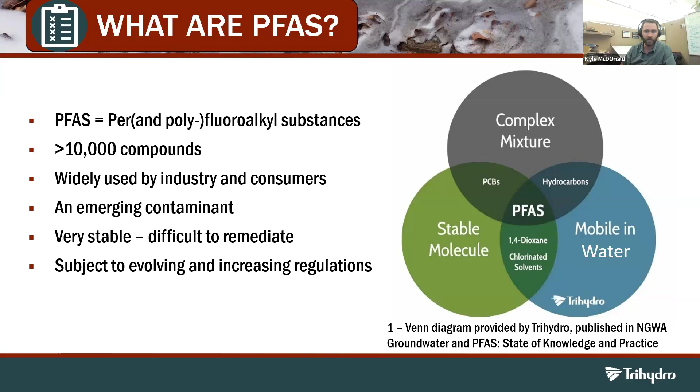Next slide, Jordan. So we're going to go through a really quick timeline on PFAS, and the purpose here is really just to illustrate why you're hearing so much about PFAS right now. This is the PFAS emergence timeline. Again, all man-made synthetic chemicals originally developed and synthesized in the 1930s and 40s, really put to widespread use in manufacturing in the 50s and 60s. So we're talking about 70 plus years of widespread manufacturing and use.

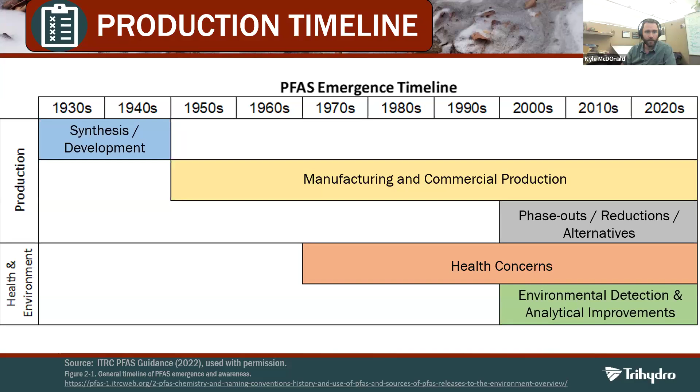But it wasn't until the year 2000 that we started looking at PFAS as a chemical to potentially regulate, and that all started with the voluntary phase-out of PFOS from US manufacturers. Next slide, please. What followed was these 2 decades of slow and steady trickling of federal regulations addressing PFAS. We're not going to go through every point on this slide, but we're calling this phase 1 of federal regulatory actions affecting PFAS. Fast forward to October 2021.

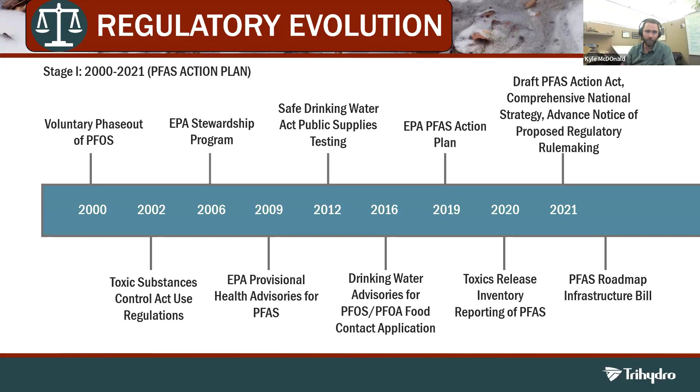And at this point, we're in the 4th and final year of the initial strategic roadmap, and it really has been the busiest and most consequential year yet. That's highlighted by several pieces of key legislation that are proposed or final. Next slide, please, Jordan.

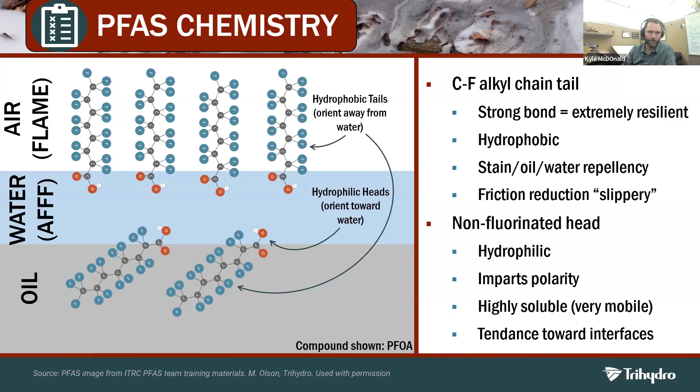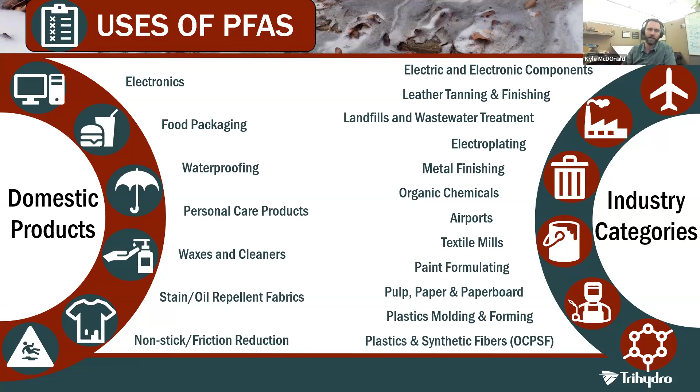Those attributes lead to PFAS being used in a wide range of industrial categories and domestic products. Those listed on the slide here are some of the better known ones. But importantly, this list is not comprehensive—we know PFAS are used in many other products and industrial sectors. It's kind of at the stage of where we know what we don't know here. There's a lot of effort, including pieces of federal legislation, being pushed to understand how widespread PFAS use is in our modern world. Next slide.

The ubiquity, coupled with those very low levels of interest—parts per trillion, low parts per trillion levels—give rise to a very heightened risk of cross-contamination and false positives in data when sampling and analyzing for PFAS. Couple that with the fact that your results are likely to be scrutinized because this is very much the hot topic of the moment. It creates a very uniquely challenging situation in terms of sampling and analyzing for PFAS compounds.

It is very important that if you have personnel sampling for PFAS, whether that's voluntary activities or activities compelled by some sort of regulation, that your field personnel are knowledgeable and well-trained in PFAS-specific sampling protocols. There are a number of pitfalls here that can result in your data being faulty and ultimately unusable, or answering questions that you might not be asking.

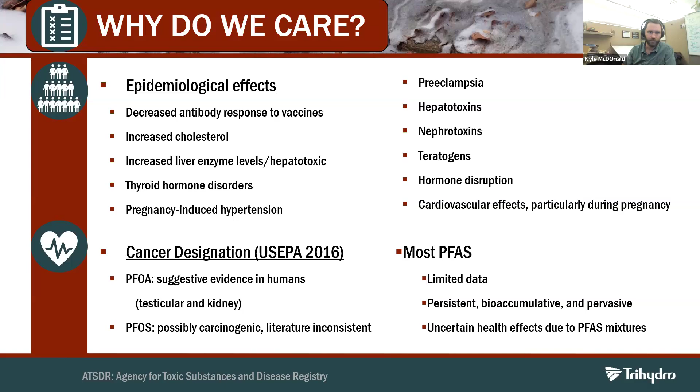So that's drinking water. How about environmental contamination? Next slide, please.

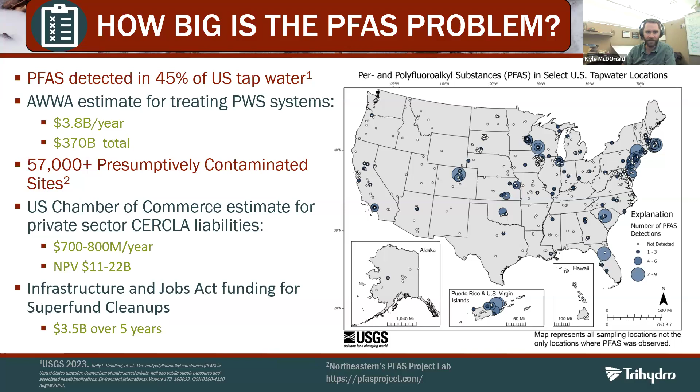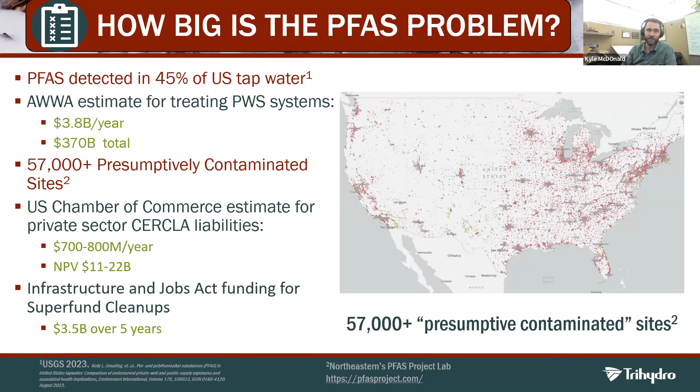The U.S. Chamber of Commerce estimates that private sector CERCLA liabilities are going to cost $700 to $800 million per year. So, the extent of contamination here is very large and potentially very, very expensive. Next slide, please.

So I'm going to finish on one final slide here on PFAS treatment. And when talking about PFAS treatment and remediation, it's important to make a distinction between three separate categories here: separation technologies, disposal technologies, and destruction technologies. Separation technologies are technologies that will remove PFAS from bulk liquid streams, and there are a number out there that work very well, that are commercially available and well proven and very effective for PFAS.

In fact, many of these technologies are technologies that we've been using in the environmental industry for other contaminants for decades. But they all have limitations, and that primary limitation is that they all still produce a concentrated brine or spent media that still needs to be managed.

And so you turn to disposal or destruction. For disposal, there's hazardous waste landfilling or deep well injection, some site-specific considerations of on-site storage, interim storage. But to destroy these compounds, it's another story here.

And in the destruction category, incineration really reigns supreme here. It's had some hiccups over the years, namely a DOD self-imposed moratorium on incinerating PFAS impacted wastes. That was imposed because there were studies that showed regional deposition from poor incinerating practices. That moratorium is now lifted, and those concerns are largely gone, particularly if you're working with a reputable incinerator.

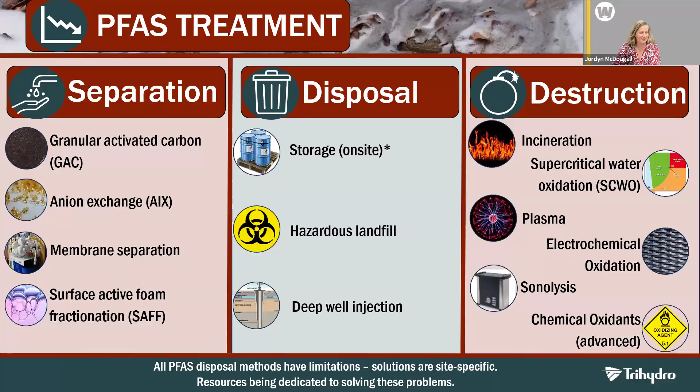All right, thanks Jordyn, and thanks Kyle for the presentation. So I'm Dustin Havel, Assistant Airport Director of Operations here at the Jackson Hole Airport. I get the opportunity to speak with you about the Jackson Hole Airport F3 foam transition that we did into last year. It was obviously a team effort, but I get the opportunity to share it.

One of the presentations we gave was at the Northwest AAA Airports Conference, and we did that with SeaTac and Port of Portland, and that was probably one of my favorite presentations. And really, the reason for that was the theme that we shared. Each airport, community, state has unique attributes, and each one of us, SeaTac, Port of Portland, and the Jackson Hole Airport, took a different strategy and process on moving forward because we all had different variables that we needed to take into account and consideration.

So with that, Jordyn, if you don't mind going to the next slide, we really just need to share a bit about the Jackson Hole Airport, kind of the environmental commitments, and really what's some of the driving factors behind why we did what we did.

I'll spend most of the time over those things, discussing water quality here, and then a little bit of time on the F3 transition. If there's time at the end, I look forward to answering any questions, and I'll share a little bit about the future.

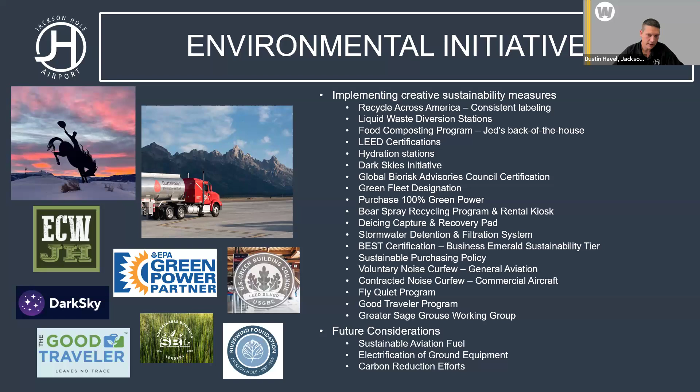Next slide, please. So water quality has been a focus of the airport for a number of years. I'll probably go over this in more detail on a future slide, but we're over what's called a sole source aquifer. What that means is the majority of the community and houses around the airport pull their water from a well versus a public water system.

So we've had a relationship with USGS since 2008, and that still continues through today. They do basically level checks and water quality tests, not so much for PFAS, but for a lot of other water quality attributes. We've used those reports and information to make other improvements at the airport, the deice pad project, ramp reconstruction, and some other things I'll be talking about in a bit.

So if you're ever interested, you can just Google Jackson Hole Airport, USGS, and you get to the website where you can pull up our reports and a number of other things. Next slide, please.

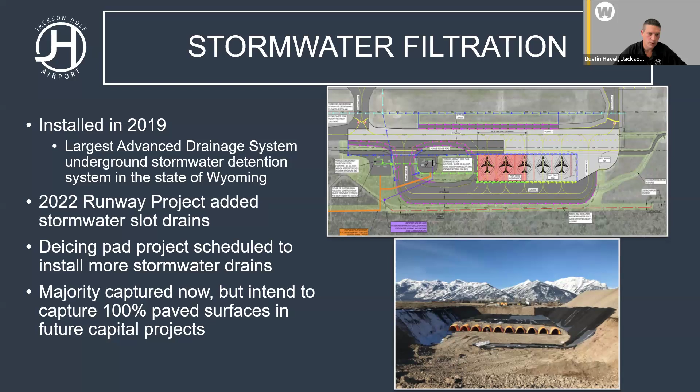After this fall, we're going to double the size of our stormwater filtration system to get us back closer to a 100-year storm event. Next slide, please.

PFAS has been a focus of our team on weekly environmental calls since 2020. As we all know, 2020 had plenty of challenges, but we started our testing and mitigation back then.

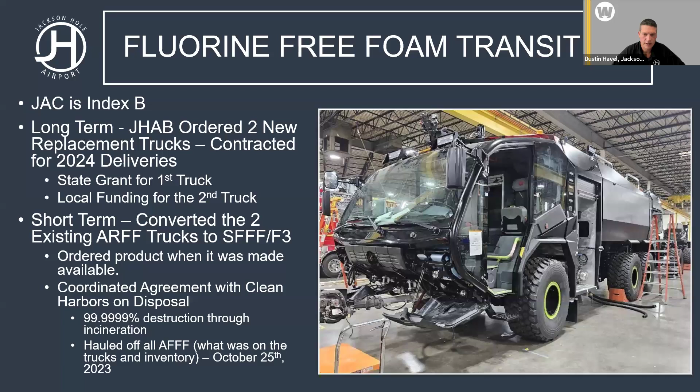So now onto the F3 transition. The Jackson Hole Airport is an Index B airport, so we're required to have 1 truck with 1,500 gallons of water and associated foam. However, we have 2 3,000-gallon ARFF trucks, and the reason for that is our distance from the airport, backup, et cetera.

Both of those trucks are mid 2000s vintage, so our long-term objective is to replace both of them because of potential rebound and a handful of other things, and again due to their age.

I really appreciate the State Division of Aeronautics. We worked with them for a number of years and got a grant for the first ARFF truck, and we are locally funding the second truck. We anticipate the first truck arriving next month, and the other one early next year.

However, given the timing of the FAA approving the Solberg F3 foam and it becoming available on the market, we wanted to additionally convert those existing ARFF trucks from AFFF to F3. We had been planning on this, so we already had the orders ready and available. We just executed that purchase and received it a couple weeks after the FAA announcement.

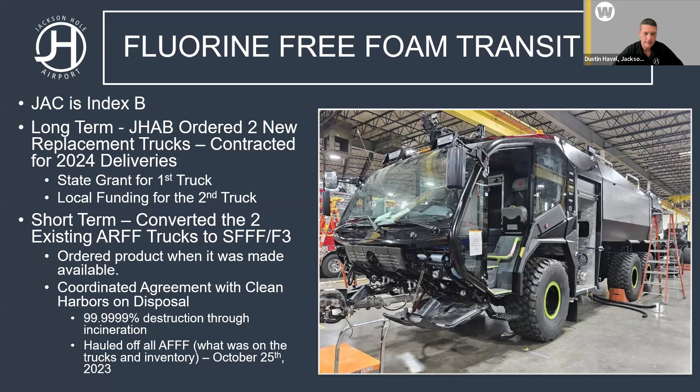Back to how I opened earlier, with our conversations and presentation with SeaTac and Port of Portland at that Northwest AAA Airports Conference - there's a lot of variables for everyone to consider. Obviously everyone here is focused on Wyoming, but there are regulations, and those are impacted by EPA and federal decisions.

Age of your trucks - it'd obviously be really hard to dispose of a relatively new truck. Funding sources, how you're going to pay for it, et cetera. Additionally, if you have public water systems and not wells and things of that nature, it could affect your decision making. So we look forward to learning from others and making any tweaks we need down the road.

And with that said, I'll hand it over to Carr and Lena to talk about their systems.

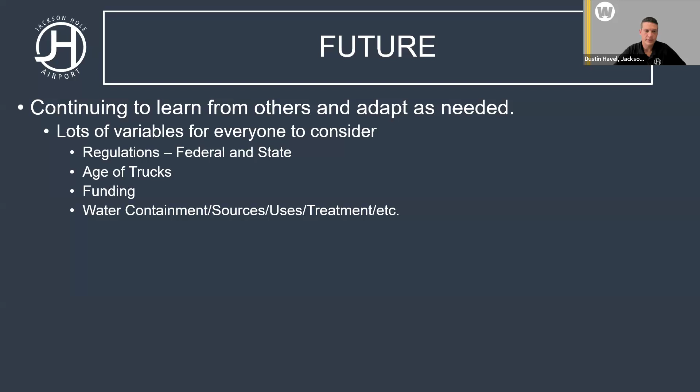Awesome, thank you Dustin. Well, Kaare and Lena are coming to the stage. Oh, I heard me, there we go. All right, welcome. Thank you.

Great, so first of all, thank you to the leadership at the Wyoming Airports Coalition and to Jackson Hole for putting this together. It's a pleasure to be a part of it. Certainly information that needs to be shared and timely. My name is Lena Ramos, and I'm with NoFoam Systems.

We're an environmentally friendly technology company that helps teams test their foam proportioning systems without discharging foam. Given the environmentally friendly aspect, as Dustin mentioned at Jackson Hole Airport, we were part of their F3 transition. We do this in an environmentally friendly way using water or surrogate liquid.

So today we're going to let you know a little bit about who we are. We're going to dive a little deeper into the F3 transition using Jackson Hole as the case study, and maybe share a little more from two other airports. We'll look at the key steps of the F3 transition, focus specifically on our expertise, which is proportioner testing, and then share the learnings from those case studies.

Just a little bit about who we are. NoFoam Systems, as we mentioned, focuses on proportioner testing. Our product is FAA approved, NFPA 460 approved, FAA grant funding approved, Part 139 airports. We have a national designation for Buy America, and we're in hundreds of airports, both civil and military, and we're universal to all ARFF vehicles.

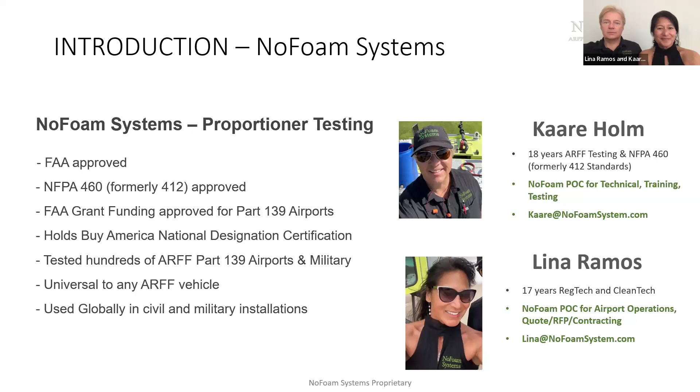So regarding the F3 transition, I'm only going to say one thing about this, and then I'll let Kaare talk a little to the technical aspects of each. But in the spirit of shared learnings, the one thing that we've learned with those hundreds of airports we work with is we're getting calls - these are the stakeholders you might expect to be in contact with as you plan your F3 transition. So who you'll purchase which F3 foam from, who will clean your truck, who will handle waste management, the hardware if necessary to your ARFF vehicle, and then our focus area, the proportioner. With that, I'll let Kaare make comment to this slide and take us forward for anything technical.

Yeah, hi everybody. So basically here is a guideline to how you do this if you want to go in and perform an F3 transition. The first circle you can see: purchase the F3, the fluorine-free foam. For that, you'd go in and check the QPL - that's the official list of which foams are approved by the FAA. So that's fairly easy right now. There's two, and there's going to be more as time goes forward.

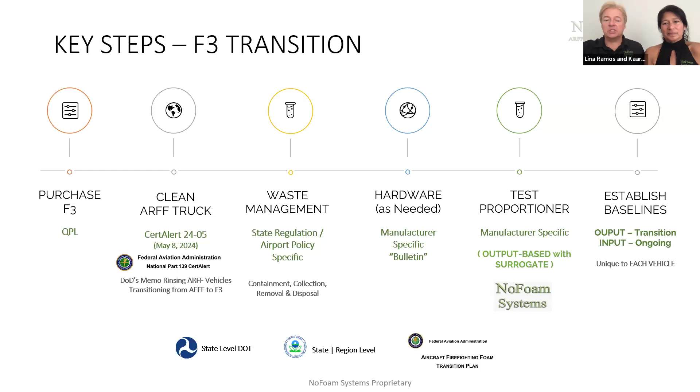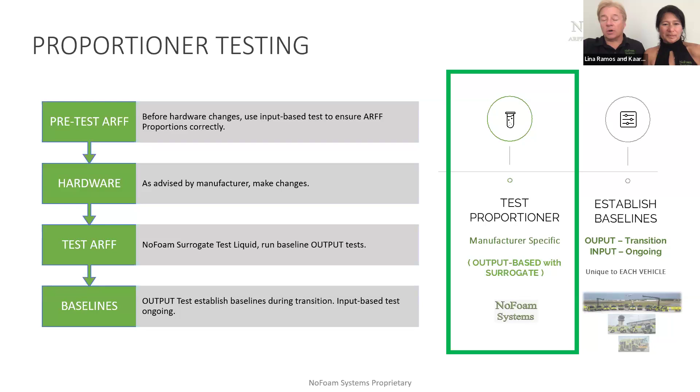So let's go back to the proportioner testing. Specifically for the proportioner testing we're involved in, we always recommend first doing a pre-test with an input-based tester before you do any changes to the truck. You want to make sure your truck is working, because it's easier to fix it before you start changing anything over. Secondly, you'll do your hardware changeover as needed, depending on the truck. Thirdly, you'll do the output-based test with the surrogate test liquid, as we just spoke about, and then you'll establish your baselines for input-based testing going forward, so you can test with water in the future.

So what does the surrogate look like? Here you see a picture of Alton, who we worked with at the Jackson Hole Airport for this specific task. They were the first airport, and also with us the first customer we were out with, and that was our first case study for how to actually do this. So that surrogate being loaded onto the truck, you do a discharge. The surrogate has the same viscosity as your specific foam - we have different versions for different manufacturers, and this was matched to Solberg's viscosity, so it flows the same as the actual foam would.

It has the same conductivity as well, so you can do an output-based test, collect the sample, and do the old-fashioned conductivity testing on it. Once it's on the ground, it's completely biodegradable, and it's very cost effective - cheaper than the foam itself, with no cleanup cost afterwards.

And here again from Jackson Hole is the outcome after doing the testing. You'll see for each discharge the actual foam percentage going through the list, and as we would hope every truck would do, it passes on everything, and that is your documentation to the FAA and to the world that your truck is still in compliance after everything you've done, with the new foam.

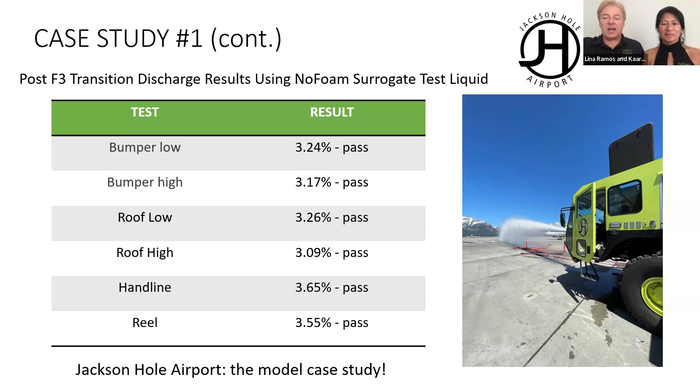I'll go quickly over this one. We did a couple other case studies, one in which they didn't test the truck beforehand. What we found was that once we did the testing, it was 5% foam. As we were doing that, it turned out the computer on the truck had to be reset. Then the truck was fixed, they did the testing again, and everything passed. The lesson is: test your truck before you begin your transition. That was case study number two.

Case study number 3 was a military airport. They were doing just fine, except one of the discharges came out at 6%. We started talking to them, and they said they wanted to have a discharge that could do 6%, so they'd set it up that way—it was consistent with what it was supposed to be. That was an illustration that each truck is different, each truck's flows are unique. You can't just assume a truck that was working before is probably going to be fine. You have to test each discharge on each truck.

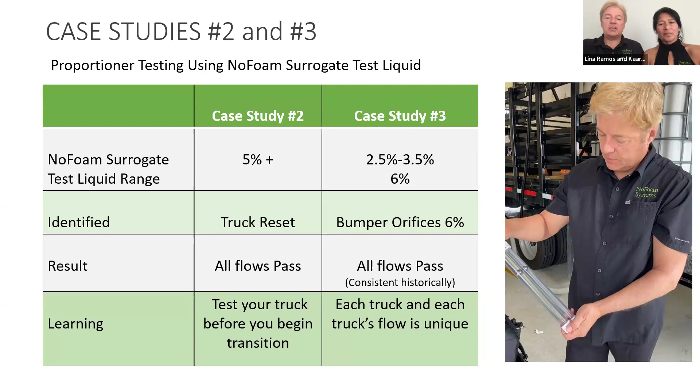Number one, look at the stakeholders and create a transition plan with all the different stakeholders. Call them up—everybody's willing to talk. We're happy to get a phone call and guide you with whatever we can do to help out.

Number 2 is be ready to pre-test your ARFF. Make sure that your truck is working, and if it's not, make sure you know it wasn't working beforehand on a certain discharge, so that when you've done the changeover, you can say once we fix this problem, the truck is back in good working order.

And then number 3 is that the FAA is accepting surrogate-based testing instead of using a foam discharge. They say you must do an output-based test, but it can be foam or the surrogate, and they are accepting a result based on the surrogate discharge.

Finally, be aware that each ARFF is unique—some need changes, some don't. The true result you need to look for is that final output-based test, and that will also serve as your baseline going forward.

And then there's still more to be learned. So if you call me up in 6 months because you're ready to change over, we might have additional things we can share with you.

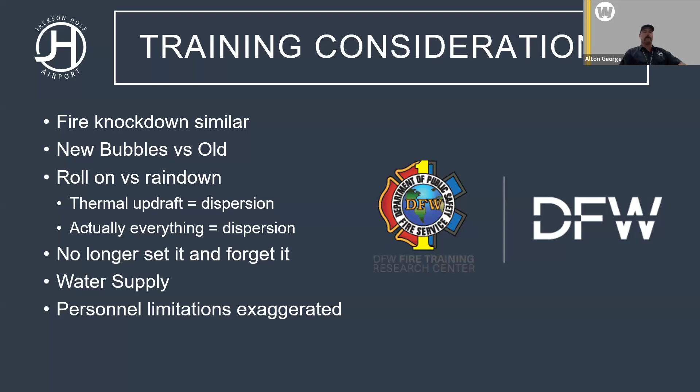So just, short and sweet, when and if you get the new F3, make sure you update your training and think through application methods. Thanks, everyone.

Thank you, Alton. Thank you, everybody. Kyle, we're bringing it right up to the very end here, but there are 5 minutes. Do you want to say anything or if anybody has any questions? Ooh, Kyle, you are muted. Well, Zoom is hard today, isn't it? It was a rough one.